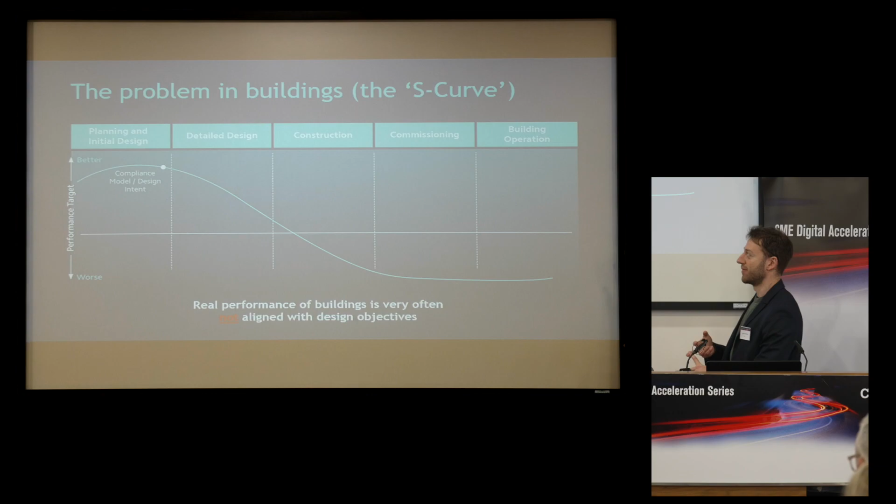Once the building actually goes into construction, like detail design, construction, commissioning, you start seeing that problems start to occur. You might go into construction, the budget starts to be cut off, so you are in the lower range of that optimal design that you were hoping for.

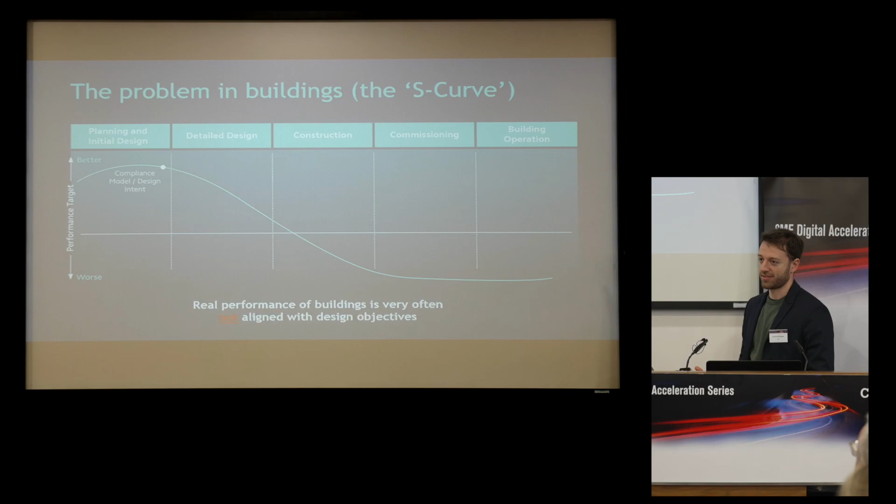Then you go into commissioning. We would have spoken with a lot of building facility managers and commissioning managers over time trying to understand what their problems were. A lot of that work is reactive work. They will see a problem, they try to understand what the problem is. Sometimes it takes 2 weeks to realize that the fan of your AHU might be clogged. So you have a problem, and for 2 weeks you'll just waste energy, and you realize that afterwards, and you wasted energy for a long time.

You go into building operation. You deliver your building to your owners. Most of the time, they don't know how to operate that building, they don't know the best way to operate it, especially if there is not a facility manager. Let's say it's a residential building, they are not really explained how to best operate that building. So you start getting worse and worse.

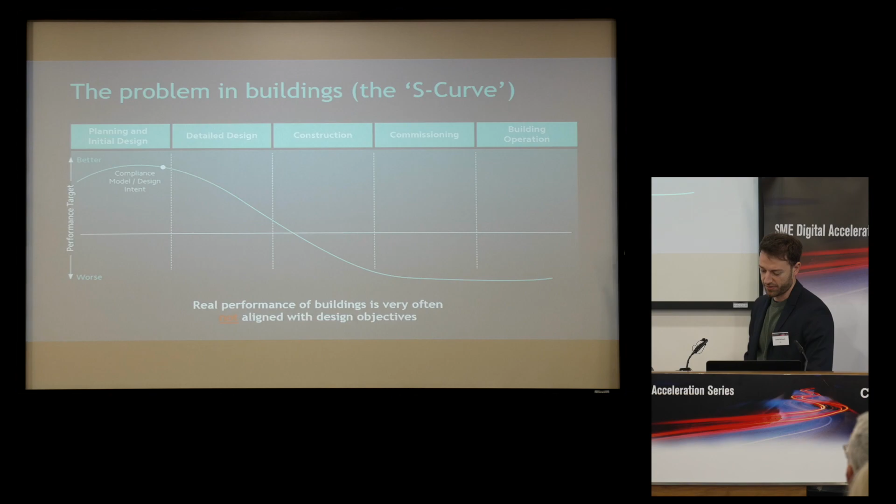The solution really that we see there is using digital. So instead of leaving that model there, the compliance model, which is what we kind of call a sleeping digital twin, which just sits there, no one uses it, and it's just telling you your building should perform like this but it actually doesn't, the solution really is just taking that model and bringing that with us during the phase of construction of the building. So the model should get updated at construction stage. You update the information with the actual as-built information that you have, and you really see your performance going on. Why?

The same goes for building operation. Say we're in a residential building with a detailed digital twin, an energy model. The model, using machine learning and AI, could tell you that tomorrow the weather will be colder than today, so maybe you should start your heating at 6 a.m. rather than 7 a.m. You can save energy that way, because occupants won't feel cold when they enter the building and won't set the temperature to 28 or 29 degrees just to warm up, then leave it there all day. So this interaction between the model, commissioning managers, and building operators should be more straightforward.

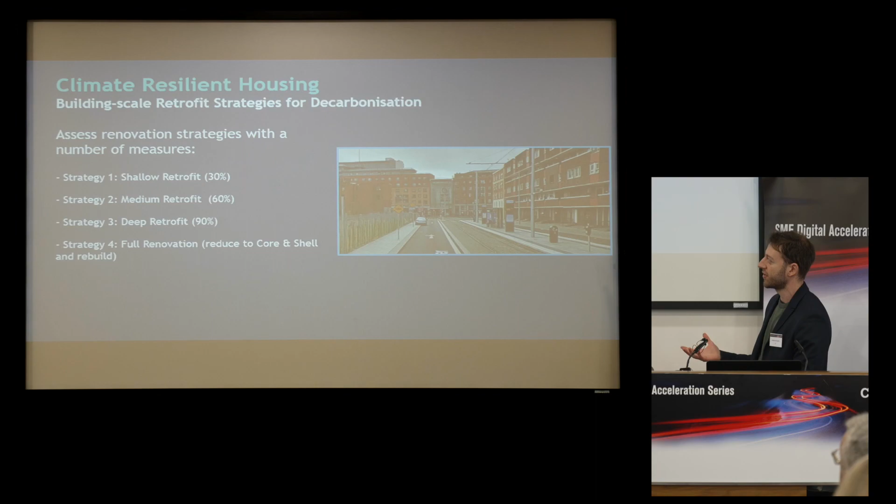Given the condition of the building, beyond strategy 1 and 2, we analyzed 4 different strategies: shallow and medium retrofit, where those percentages are an indicative way of saying how much energy you could save. We went into more detail through the tools. Really, what they were interested in was more strategy 3 and 4, the deep retrofit or a full renovation, basically reducing the building to the structure itself and rebuilding it completely. What's really more efficient from an energy and carbon impact perspective? We looked not only at the operational side of things, but also at the embodied carbon, to have an overall picture of the impact of the study.

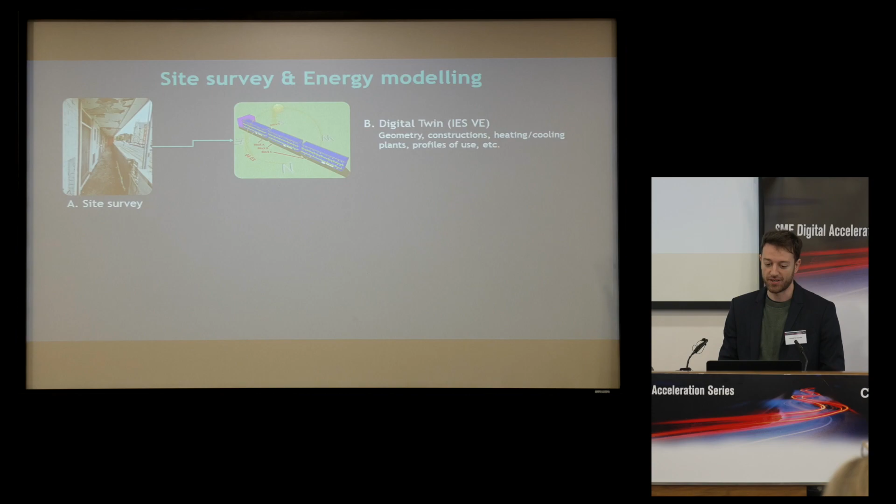So how did everything work? We started from a site survey, and you can see from the picture that the conditions of the buildings weren't great. We collected all the information needed and created digital twins for all 3 blocks. Then we analyzed one block specifically, the one in the middle. They are all identical to each other, and through the energy model we assessed that the difference in energy performance would be less than 1%, mostly due to the solar shading assessment.

Once we created that digital twin, using the geometry information, construction, the heating and cooling plants and so on, this was tough work. I want to link back to that building passport that Mary was mentioning before. If we were to have a building passport with all this information across all buildings, that's something other industries already do.

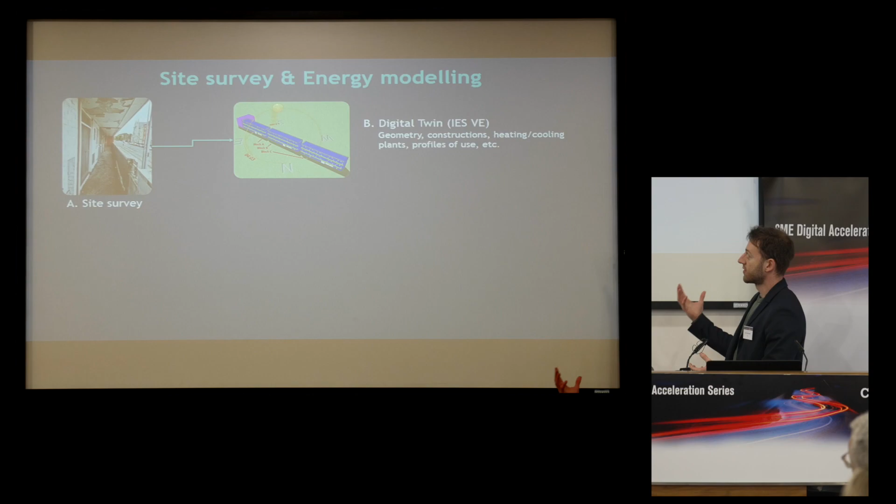If we go into the automotive industry, there's no way someone says, okay, I need to find information about this car — you already have it available. So ideally, to scale this, we would really benefit from digitalizing the built environment. So the tough work was collecting all that information, especially for older buildings.

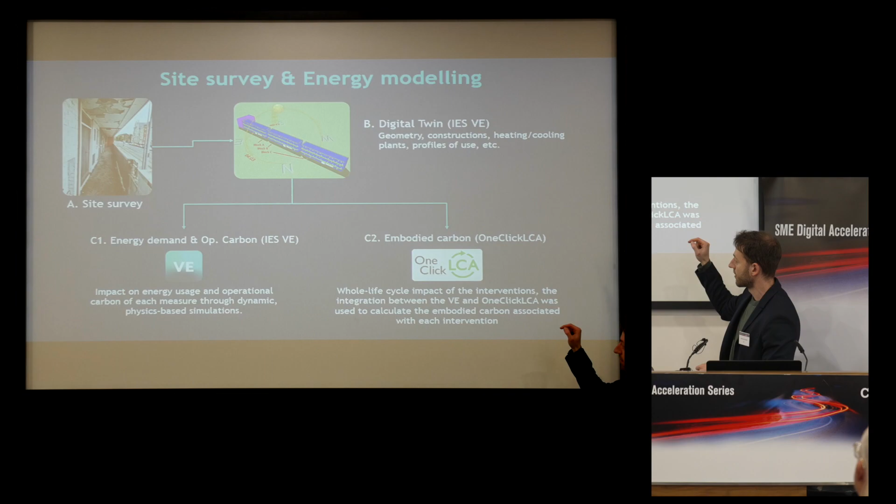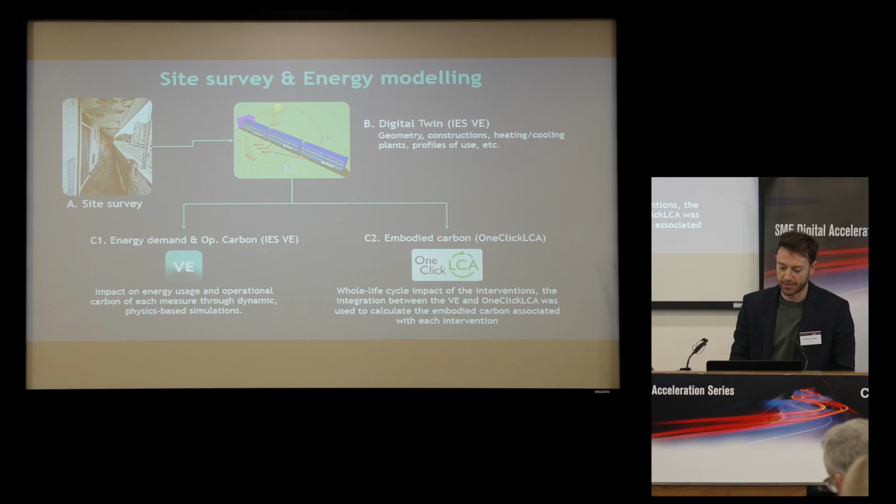They're not always available. Once we did that, we started analyzing the energy demand and carbon emissions from an operational perspective with our tool, the virtual environment. Then, in parallel, we analyzed the embodied carbon impact through One Click LCA, which Mary also mentioned before. We have an integration within our tool with One Click LCA, where basically we can export our building into it, and One Click LCA has a database of embodied carbon impact of materials. We used that information to also study the embodied impact of the renovation strategies we were considering.

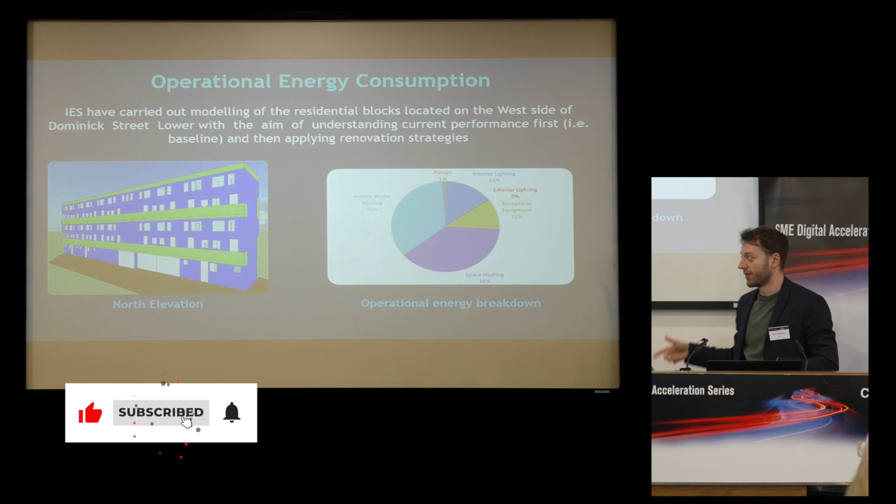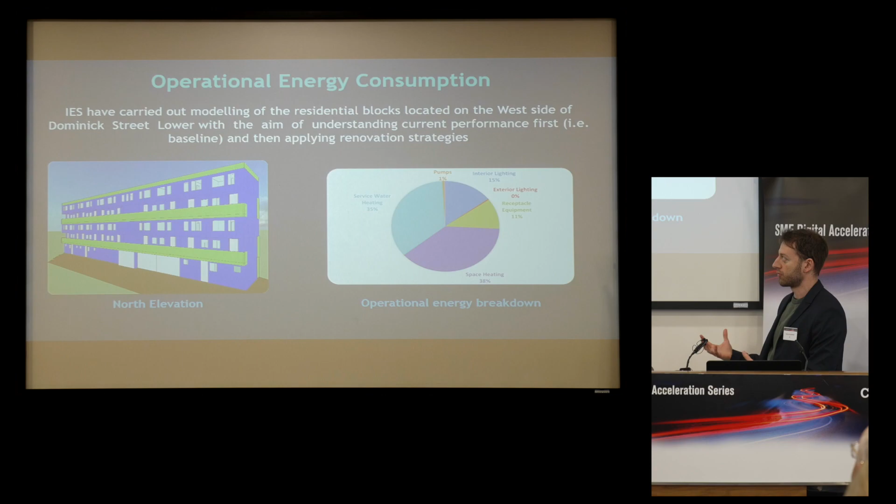From an operational perspective, the energy model gave us a good breakdown of the baseline energy consumption. You can see that most of it is space heating and hot water, with a good portion also attributable to lighting and equipment. Once we understood this, we were able to say, okay, what are the best strategies to start retrofitting the building? I'll show the results in a bit.

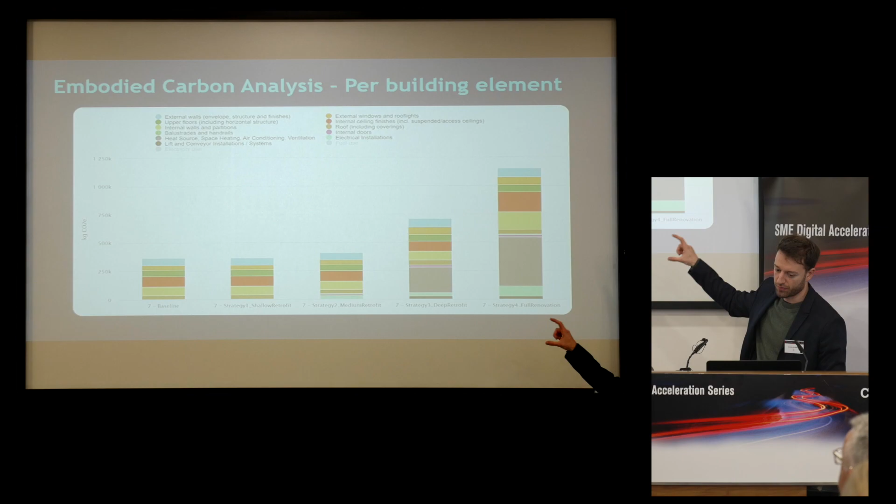Before that, I want to show the embodied carbon part. Basically there are two ways we analyze embodied carbon. One, you can see per building element — it's a bit small there, but within the retrofit strategies, a good part of that embodied carbon is attributed to the plants that are replaced. For example, replacing the current boilers with heat pumps to improve the carbon behavior of the building, especially over time, because the grid is starting to decarbonize.

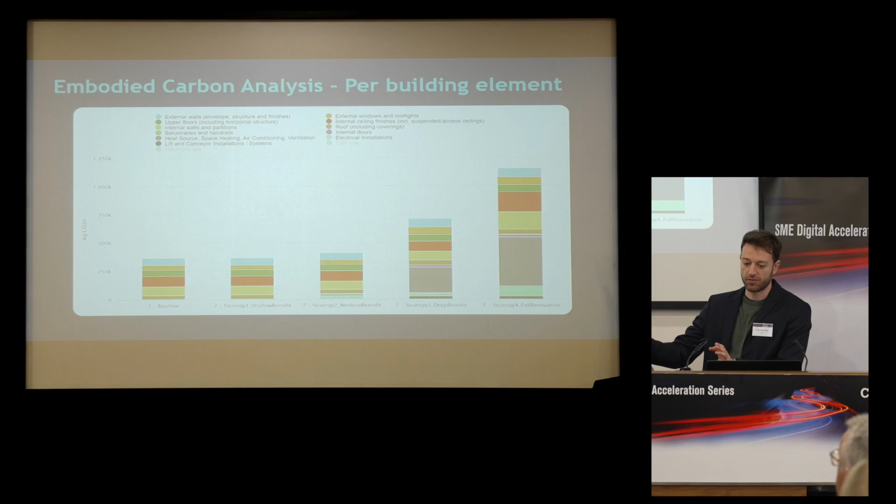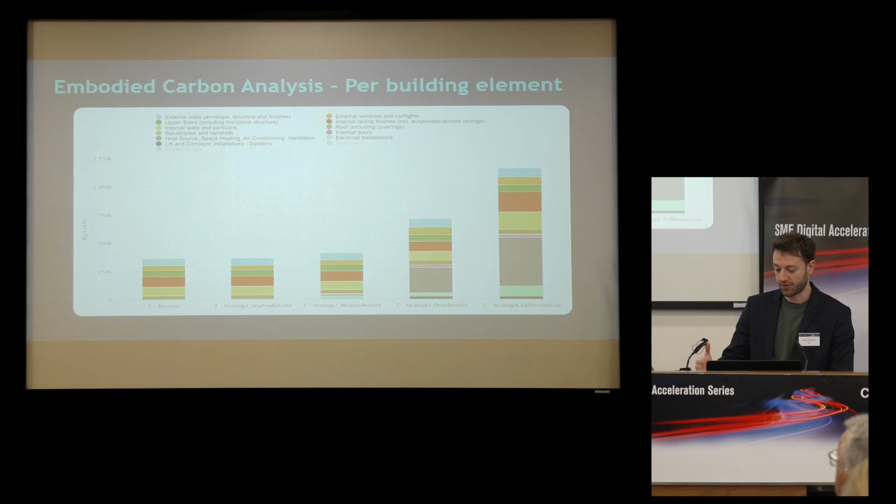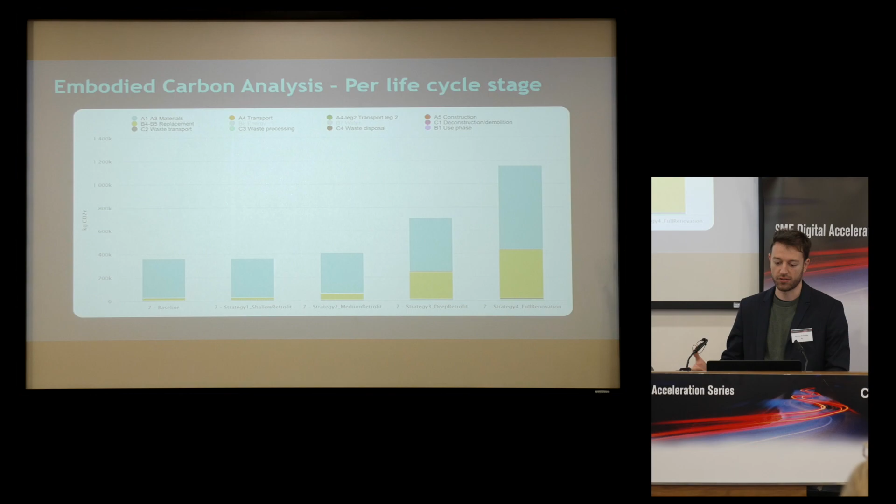So we did an analysis over the next 60 years, also using the projected factors for the electricity grid's emission factors. You can see a big impact isn't only on the structure of the walls themselves, or the insulation, but also on the plants and their replacement over time. We also did a similar analysis per life cycle stage. You can see that most of the embodied carbon comes from the materials themselves, and part of it, especially for the full retrofit, is from the replacement of plants and materials over time, because if we do a 60-year life stage analysis, your heat pumps and so on will need to be replaced every 30 years.

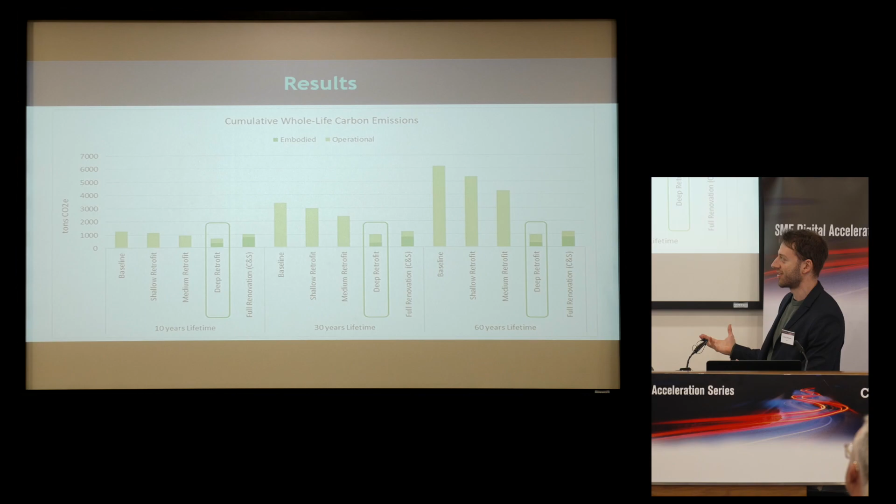This might not be the answer for a different building, and that's why we need digital tools to be able to plot these numbers rather than just using an average number that would be relevant for all buildings.

Another thing we created as part of this project was this dashboard, because it's important to communicate the results. We can do all the complex analysis in the background, but it's important that the city council or whoever is the client then communicates this to their stakeholders to show the value of it.

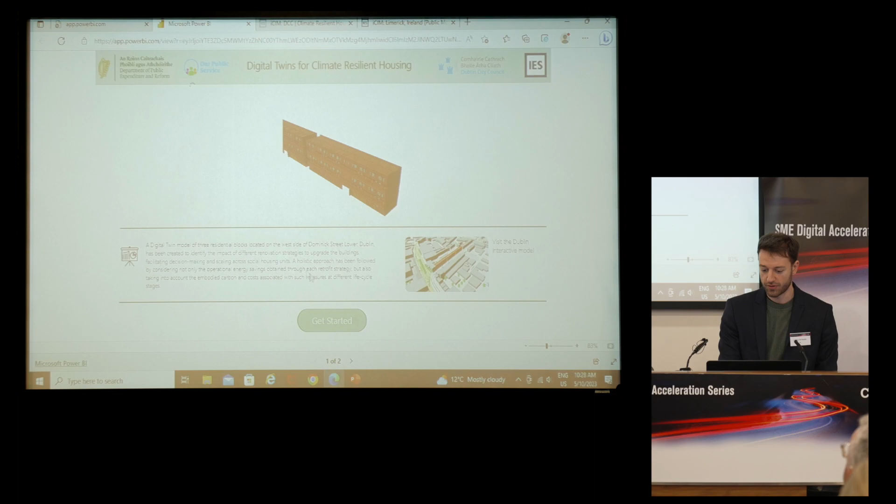We've created this dashboard, which I opened earlier just to make it quicker. Let's see if I can have it here. So basically this dashboard is a way of showcasing the results. We have this homepage, which gives a summary of what I said already.

In the next page, what we can do is show the impact of all our strategies in an interactive way - if we select a certain strategy, like a deep retrofit or a medium retrofit, what's the impact of that? On the top right, we can see the whole life CO2 emission of the baseline against the selected strategy, and I can plot that against 10 years, 30 years, and 60 years based on what I want to show.

The investment cost is just indicative because as part of the project we did analyze costs as well, but in agreement with the Dublin City Council, we left an indicative cost between 0 and 4 for low, medium, and high. This is just an example, and there is a full report that is accessible and public - it's on the website, or you can send me an email afterwards and I'll share it with you.

We also created a 3D model for the City Council to access their model. We've created a model of the whole Dublin city center, and in more detail, models for those 3 buildings. This model is loading a bit slowly, probably because the Wi-Fi is slow, but it's a way of accessing results, and potentially in future, mapping anything else against those buildings.

So if I go here, for example, I can zoom into Dominick Street Lower buildings. You can see the 3 buildings there. I can click on a building and start looking at all the KPIs that I was showing before.

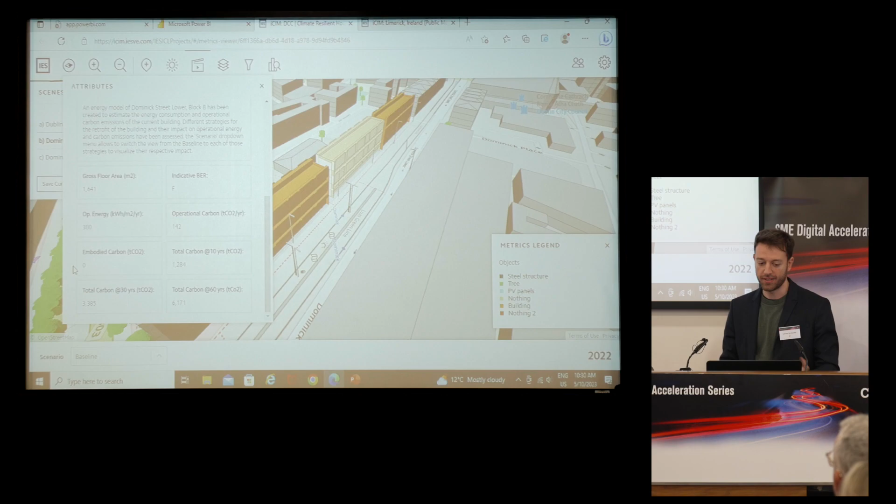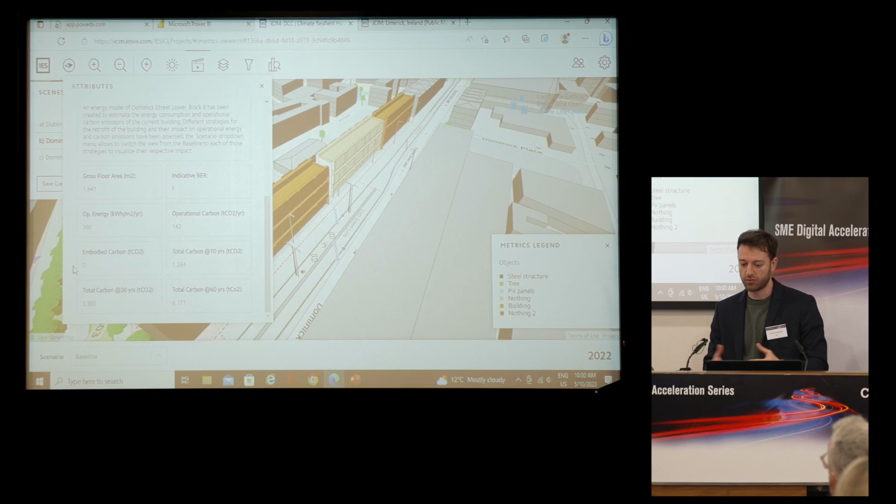You can see what's the floor area of the buildings, what's the BER, the operational energy use. If we have live data, if a building owner in the future wants to map their meter data to this model, they can use the same model to map meter data and have their own private dashboard, so others can't access their building data. They can have everything in the same platform. That's really the digital transformation we are going through.

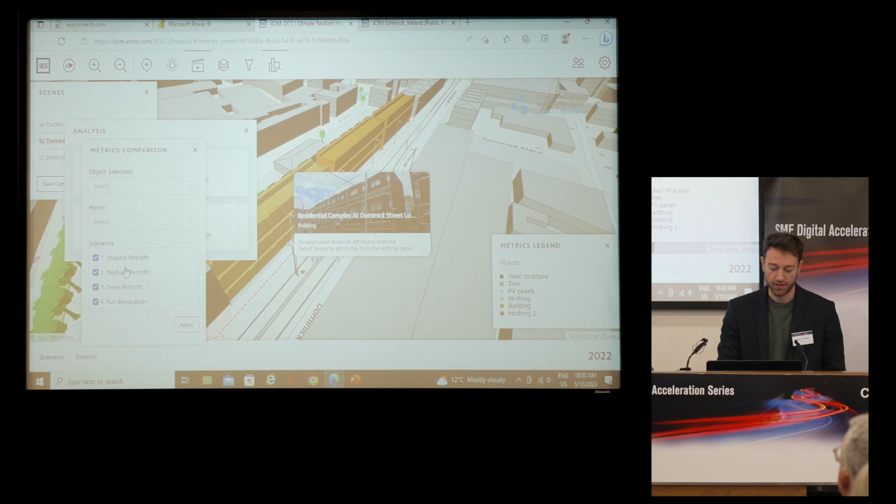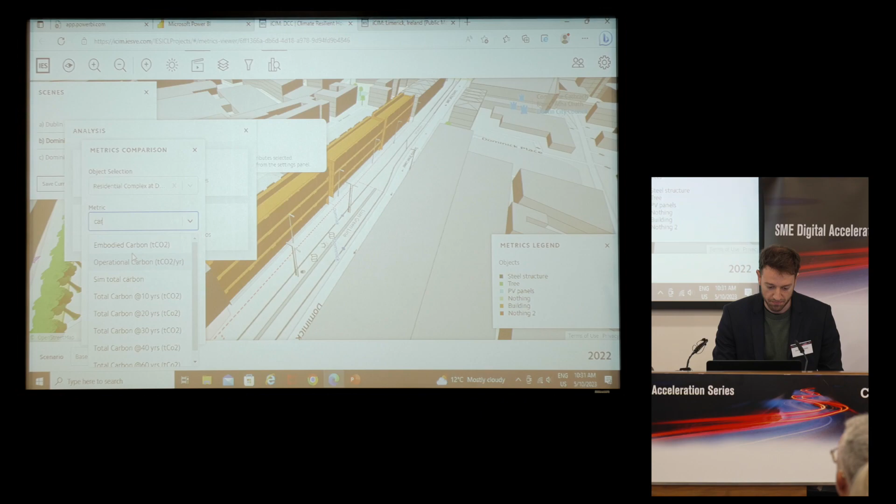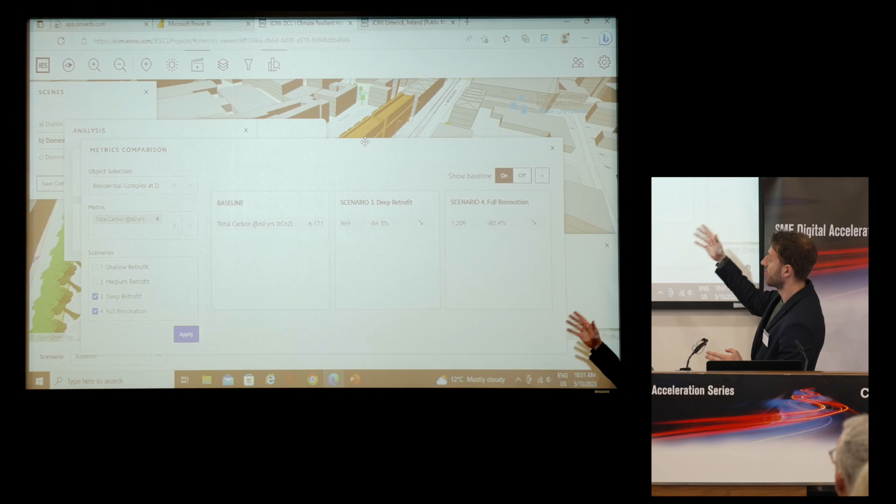In this, they can also say, okay, I want to analyze a comparison. For this specific block, I want to analyze what happens in my shallow, medium, deep, and full renovation. For example, I want to compare only the deep retrofit and full renovation for block B, in terms of carbon - let's say embodied, or total carbon at 60 years. So I apply this and I can see how my carbon is being impacted from the baseline scenario to the retrofit scenario for full renovation. It's an interactive way of visualizing all the results.

Going back to the main presentation, I'll quickly go through the second case study. I'll really fly through the first 3 slides because they're about a case study shown last year, but I'll focus on the last couple of slides, which are a follow-up of what we've done. Just to give a little context, this project is part of an R&D project.

It's called +CityxChange, and we've created the model for the city center, the Georgian district of Limerick city. What we've done is basically say, okay, we want to help the city council and the city map their policies over time and understand how they can decarbonize the city center according to the current policies.

Very briefly, we created a model of the whole city center. You can see the division between public, commercial, and residential buildings. We collected all the information from the city council, from SEAI public BER databases, anything we could collect based on building age and type. We started to collect U values, type of plants, fuels, and so on, and mapped the energy use of the buildings at baseline.

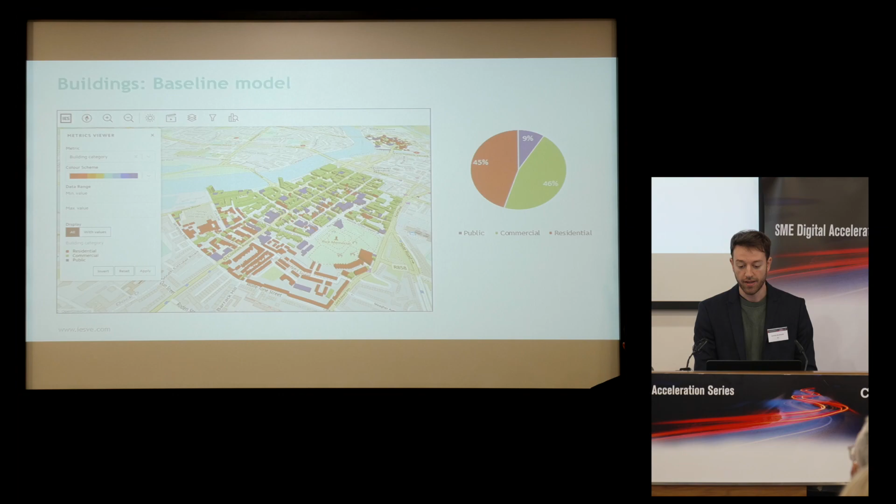After that, we said, okay, we need to map the policies. So we took the policies - I'll go quickly through this, but can send more material afterwards. We started saying, okay, we add electric vehicle chargers to the model, and those aren't just visual, they're actually energy consumers in the model. Every energy consumer, every energy generator is mapped through the model. We started saying, okay, we add PV panels according to the climate action plan.

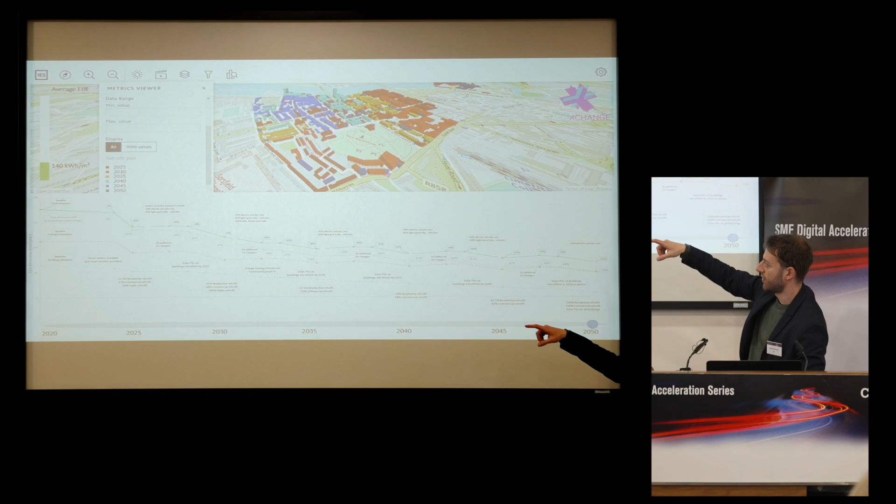So very quickly, towards the end: in 2050, you can see that the 3 lines represent the total carbon emissions, and the orange and blue are transport emissions and building emissions.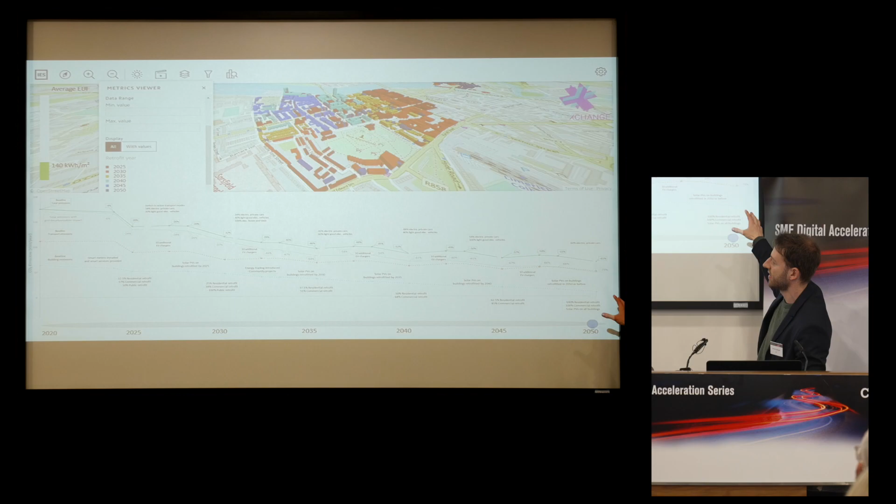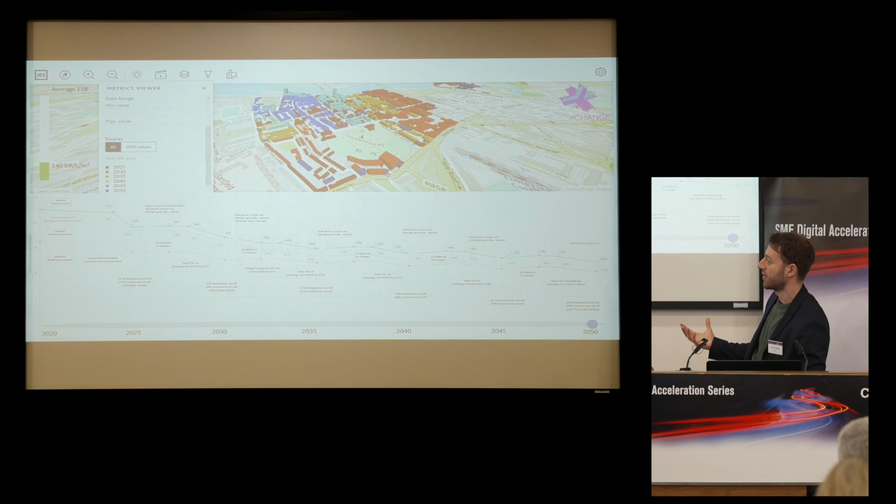So we mapped all of that, and we said, okay, we can achieve about a 70% reduction in total carbon emissions with the current policies, but that's really a sign that we should do more. So the current policies sometimes might not be enough. We should push even further, and that's a brilliant way for a city council to say, okay, take all this paper that you have and translate that digitally and see where actually we can get.

And as I was saying before, what I wanted to also focus on was a little bit more insights on these 5 buildings. So what we've done was, once we've done that large scale analysis, which again needs to be taken as a guidance, so all these models have a higher level type of information. Then once you go and say, okay, actually I want to take this building and retrofit this building, and I want to measure and verify the performance before and after my renovation. So you start doing energy models of those 5 buildings.

In this case, it's a mixed-use block, also because the idea was to turn this into a positive energy block where the buildings potentially could share energy. We'll say, for example, there are PV panels on the rooftop of residential buildings. Maybe there is no one in the residential buildings during the day, so that energy, instead of being wasted or fed back to the grid, can go and be used by commercial buildings nearby. That's the kind of idea behind the positive energy block, and that's where also the concept of a virtual network comes into play.

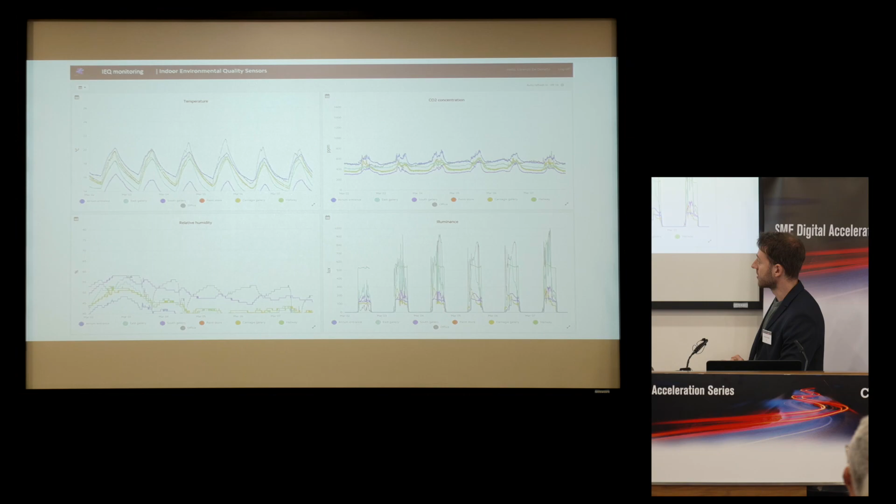In this case, for example, we are looking at some sensors and IoT that we installed in one of the buildings. You can see here the illuminance level, CO2 concentration, temperature, relative humidity, and these are the various rooms. So really what's powerful here is that all these dashboards can be accessed directly from that same digital twin.

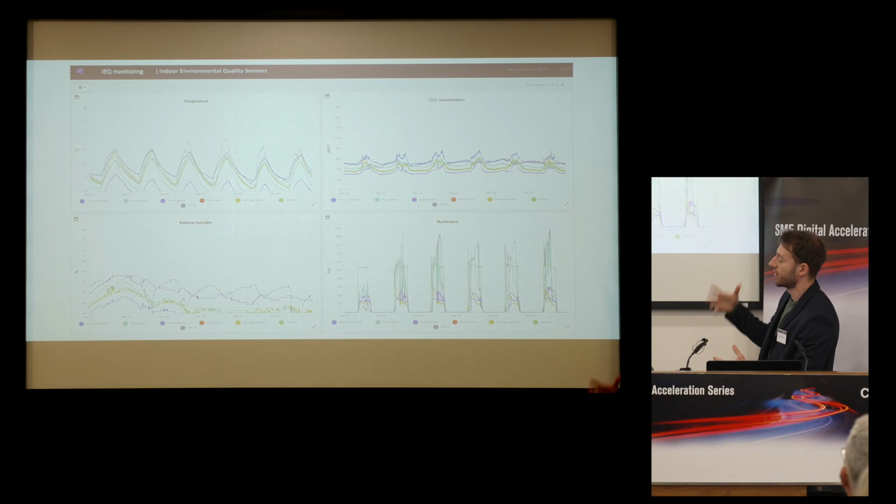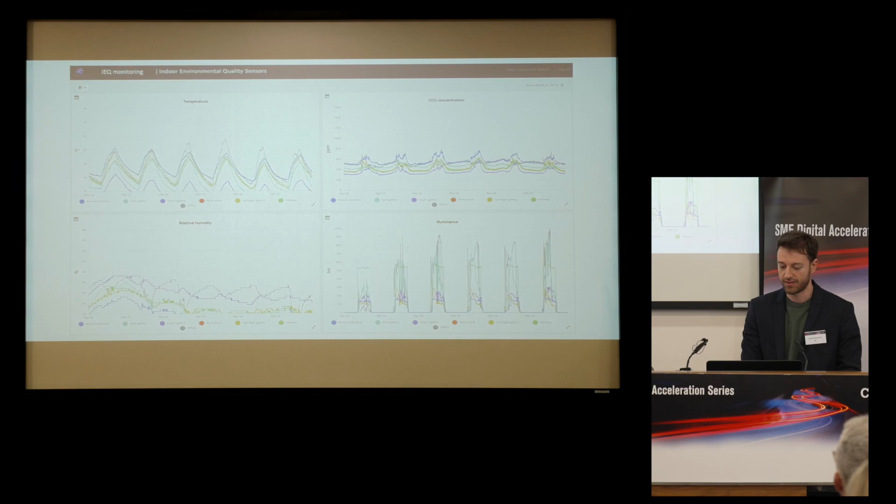So let's say a facility manager, for example, might be interested in looking at, okay, what's the CO2 concentration in this particular room? If they see that there is a peak, they can immediately say, okay, there is something wrong here, and they don't need to wait for someone to complain about that after 1, 2 days or a week. So there is an immediate way for them, even setting alarms and saying, okay, there is something wrong here, let's go and fix it. And even more interesting is probably the next slide, this one.

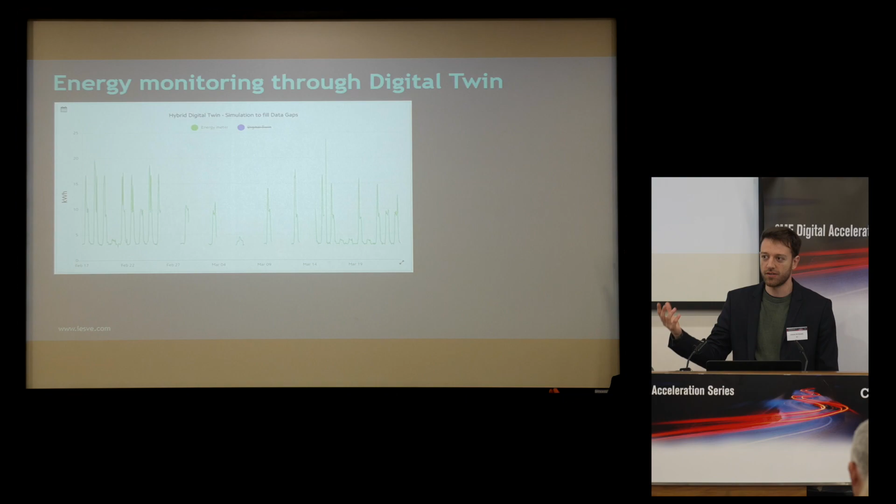This is an example of energy monitoring. And so here we are monitoring electricity specifically for a building. So you can see that the green lines are from the energy meter. You can see there are a lot of gaps there, which is not something rare. It actually happens often. It might be connection issues of the smart unit. It might be Wi-Fi issues. It might be anything. In this case, there were constructions nearby that caused the issues.

So really, the power of the digital twin is then, a building owner here could say at the end of the month, oh, that's great, I consumed less energy than last year, but they wouldn't realize that probably it's just because some of the times during the day or during the month weren't considered. So at the end of the month, they might receive a bill and say, oh, there is something wrong, I consumed less than last year, why is my bill higher? So the power of the digital twin there is really filling those gaps.

You can see that in this case, we calibrated the digital twin very well to be as representative as possible of the building usage. And the purple ones are the values that are replaced from the digital twin. So whenever there was a gap, we created this concept of a hybrid digital twin, which uses live data as much as possible. But whenever there is a gap, and in this case, it's about 15% of the time in this time frame, it replaces that gap with the digital twin data.

And what this allows is then to map reliably the consumption of the building over time. So there is no, let's say, misunderstanding with your energy bill. There is no performance gap between your energy bill and what you're actually seeing on your dashboard.

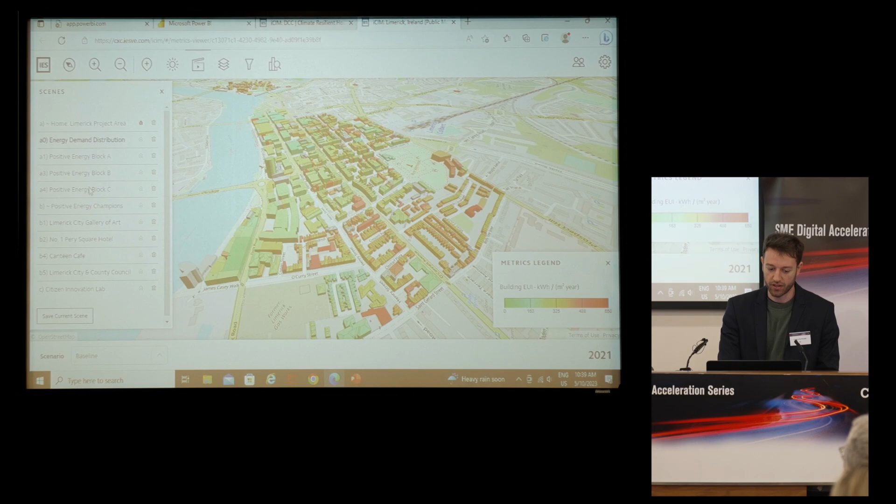Before I go into the summary, just very quickly, I opened here also the model. So similarly to what we've said before, we've created a model for the whole Limerick city, which is this one. And through the model, previously I've shown some KPIs, but really through the model, you can potentially visualize anything, input, output data. So in this case, I'm showing the building energy usage intensity in kilowatt hour per meter square of the whole city.

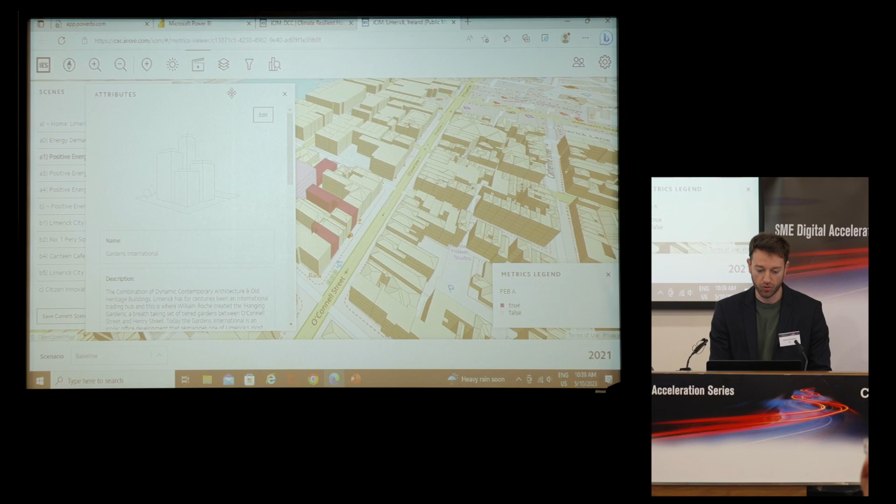Then you can go and zoom, for example, in a particular block, which is the block that I was showing beforehand. And then you jump into a building and you can say, okay, actually, I want to look at the consumption specifically of this building. In this case, we are showing the monthly energy consumption in terms of total energy and total carbon emissions.

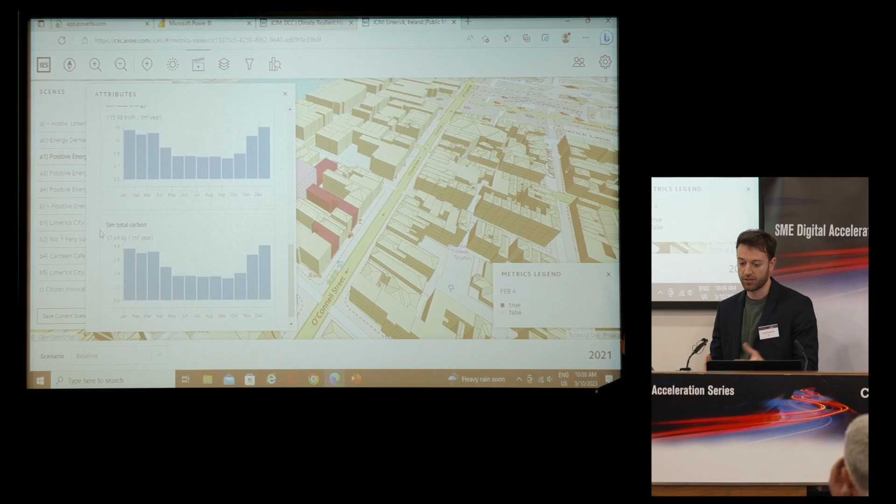So anything that we want to display here, whether it's energy, whether it's, for example, vacancy data, which was something very important for Limerick because a lot of these buildings are vacant. So it's a good way for them to just through a button click map their data and then visualize, okay, what are the main vacant buildings in my city? So what should I address first when I go and address the policy of retrofits?

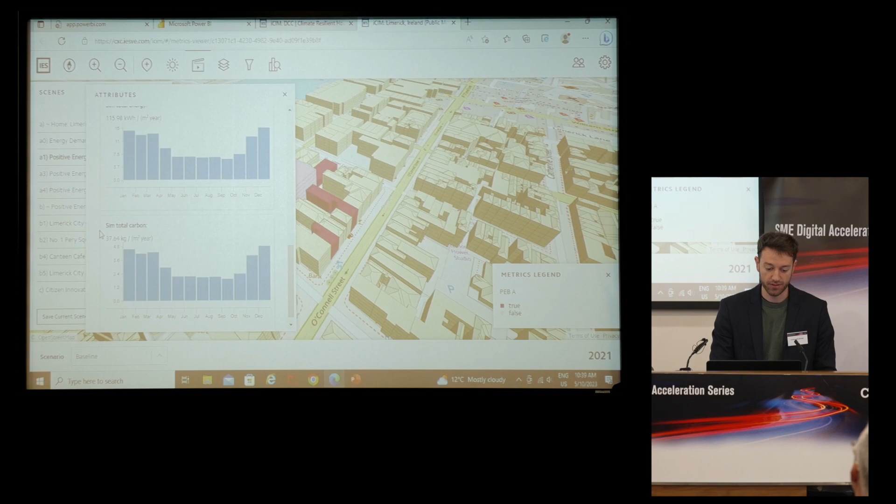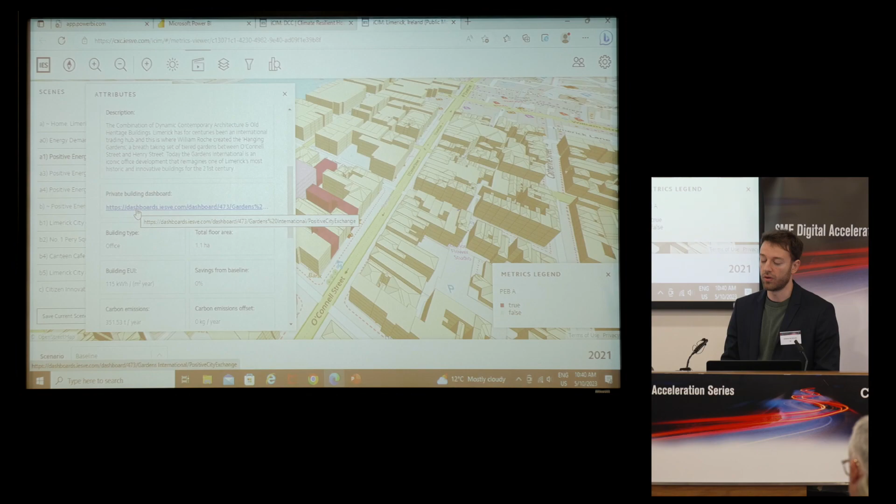And also there is that concept of the private dashboard that I was saying before. I won't go into this because it's private data, but the building owner will have his own private access to their building dashboards, or a facility manager, or whoever they want to give access to. So through the same model, they can then go into another layer and look at those live data and try to understand those data and make sense of those data again.

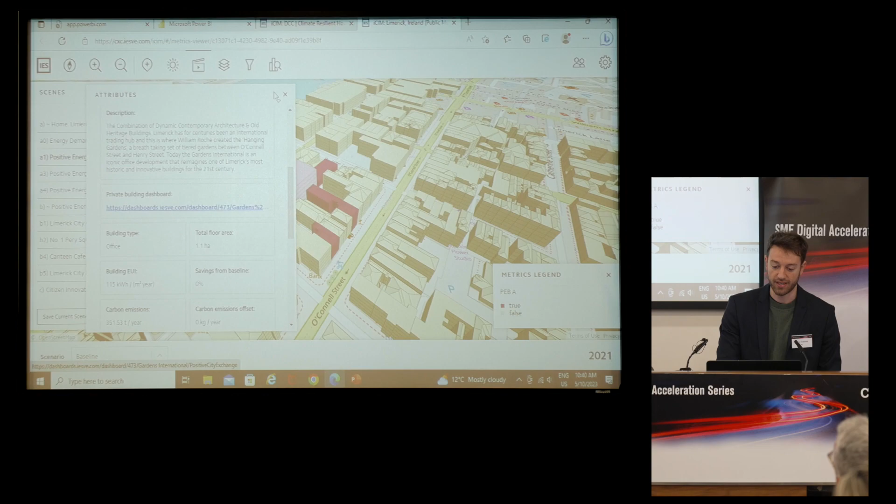We want to balance energy and carbon. Also, we've spoken a lot about ESG targets, so that's also something that through digital we can look into. We can build dashboards for clients or for whoever wants to report about that sustainability concept in general. So not only detailed digital twins, but also depending on the stakeholders, we can address different targets and then really plan for the future and track your progress.

Because we can plan. We can use the policies, but then it's important to track that progress and not forget in 10 years where we were expected to be today. So really, it's important to use the same twin to then map the progress over time.